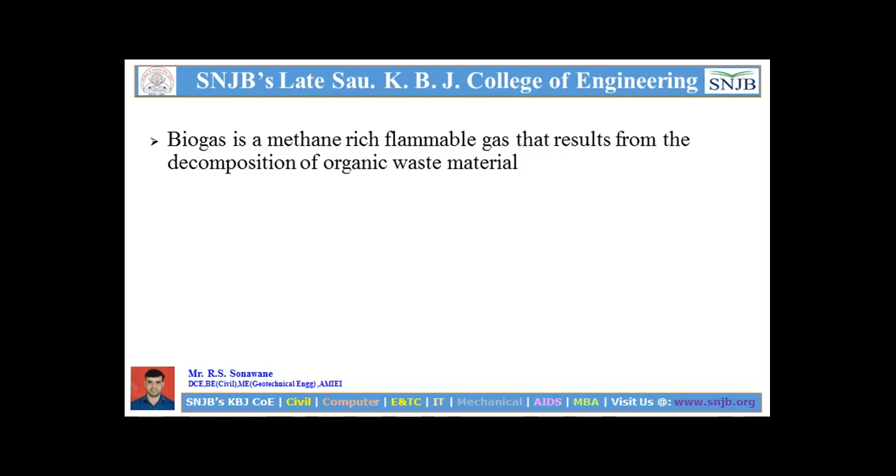Is that clear? This is the first thing. Then, biogas is produced by anaerobic digestion. In the previous 2 or 3 lectures, we discussed that anaerobic means absence of oxygen. And anaerobic digestion is the fermentation of biodegradable materials. It means in the absence of oxygen, organic matter can be decomposed, degraded or biodegraded, such as biomass, manure, sewage, municipal waste, green waste, plant material, or energy crops. Such gases produced by decomposition or degradation are called biogas.

And generally biogas is produced by anaerobic digestion or fermentation. Biogas is also called marsh gas. This is a very important term: biogas is also called marsh gas. Biogas is a type of biofuel. A biofuel is nothing but a gas which is flammable; it can be a fuel. In Marathi you can say it's a what?

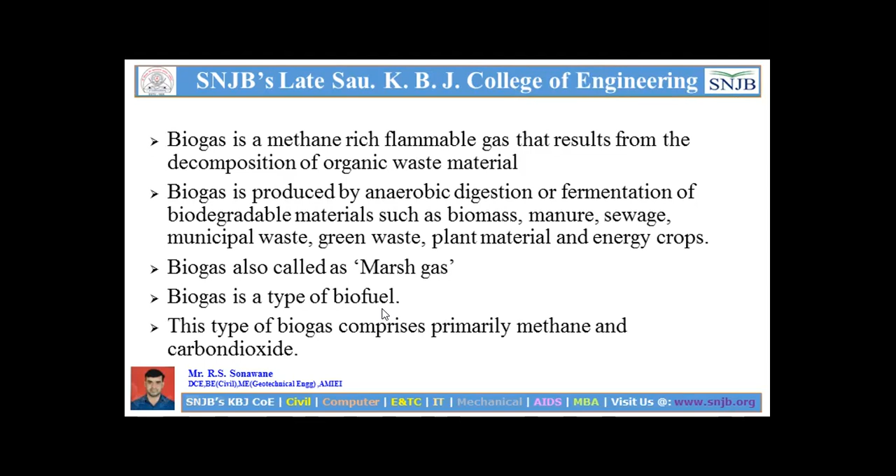This type of biogas comprises primarily methane and carbon dioxide. In yesterday's lecture, I told you how to create biogas. It's comprised primarily of methane and carbon dioxide. There can also be nitrogen, hydrogen and other elements, but mostly biogas is comprised of methane and carbon dioxide, and this is what biogas is.

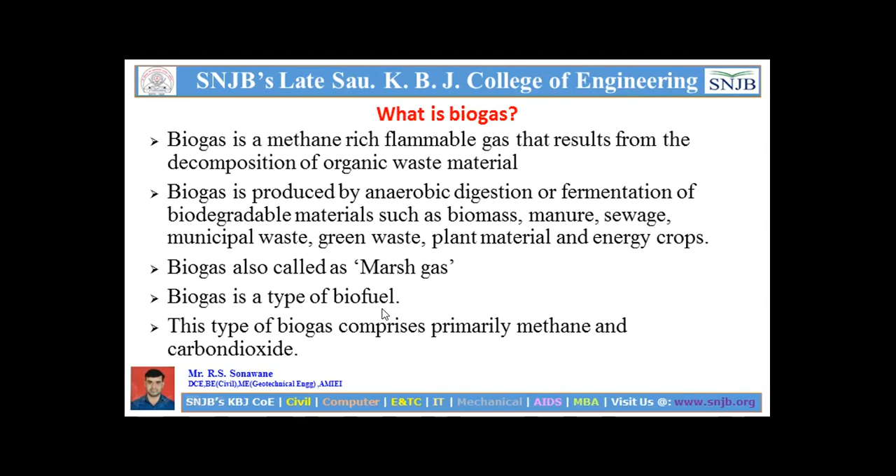If you raise the question, what is biogas? The answer is here. In short, biogas is a methane-rich flammable gas which comes from the decomposition of organic matter. Biogas is also called marsh gas, and biogas is also a biofuel. So this is about biogas.

Then we will see what the composition of biogas is. That is very important. Biogas is generated by the activity of anaerobic bacteria. Its composition depends on the composition of the raw material, the organic loading to the digester, and the time and temperature of anaerobic digestion.

Raw material, organic loading to digester, time and the temperature of anaerobic digestion. For the composition purpose, these things are very important. In the composition section, we can see here what are the substances, what are the symbols, and what are the percentages when biogas is created.

So in the substances, we can see here methane, which is symbolically identified as CH4, and its percentage in biogas is 50 to 70%. Then, in the composition of the biogas, the second substance that we can see here is carbon dioxide, symbolically identified by CO2, and its percentage in the biogas is 30 to 40%.

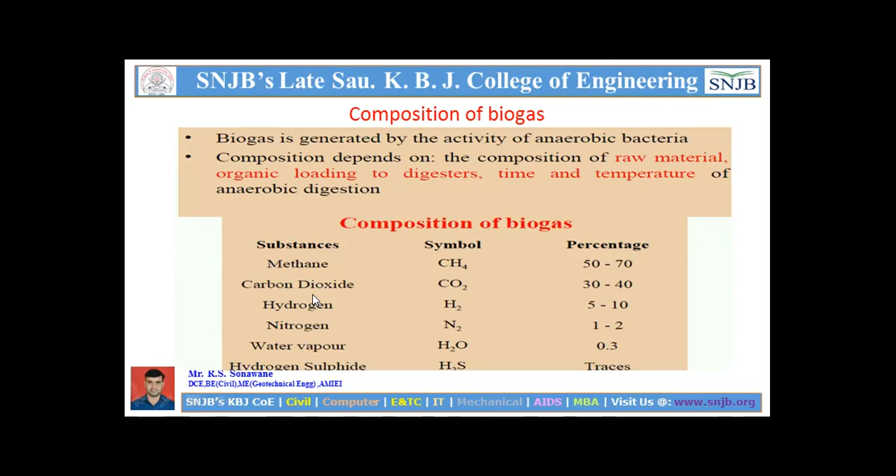So now we will see factors affecting yield and the production of biogas. What are the factors affecting yield and how to produce the biogas? Many factors affect the fermentation process of organic substances under anaerobic conditions. Out of that, we can see here the quantity and the nature of organic matter, which is very important when we are producing biogas. The quantity and nature of organic matter should be known.

The temperature is very important. Such factors we've seen in a previous lecture, the governing factors for anaerobic digestion or the digester: pH, temperature, quantity of organic matter. But once again I'm telling here, the first condition we should know is the quantity and nature of organic matter when producing biogas. Then temperature is a very important factor, and yesterday's lecture told you what temperature we maintain in the production of the biogas.

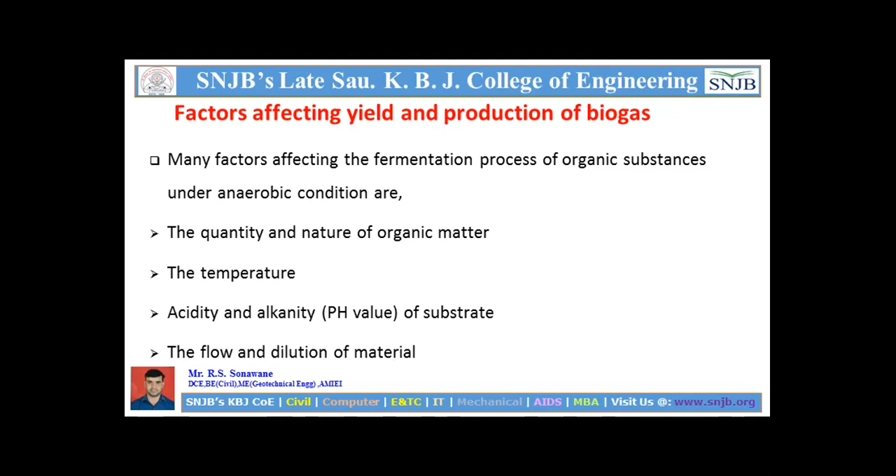Then the flow and the dilution of the material, which are related to the mixing of the organic matter, are very important when we produce the biogas. These are the very important factors for the fermentation process in the organic substances.

So now we will see here what are the reactions exactly which happen in biogas production. So you can see this organic matter, which can be separated here respectively: CH4, carbon dioxide, hydrogen, then hydrogen sulfide, and ammonia. This is a separate reaction which we use in the biochemical reaction which is happening in the

biogas production process. Okay, organic matter is broken down into a number of cells, number of subcells, and at that time it is used in that particular digestion, anaerobic digestion, and it will separate methane gas, carbon dioxide, hydrogen gas, ammonia, and sulfur gas. Okay, which uses this reaction through this organic matter in anaerobic conditions of the digester.

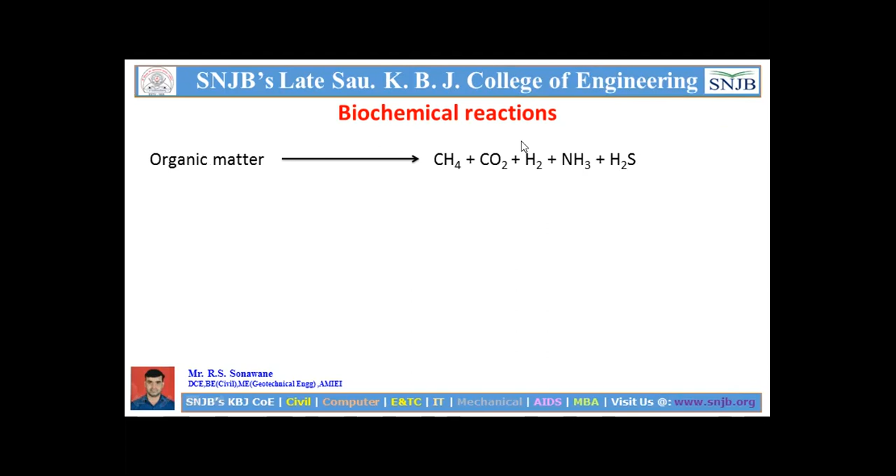The stage now, you know what conditions should be there, pH, temperature, and the other things, and what reaction will be happening in the production of the biogas. Now what are the stages of anaerobic digestion? So the stages of anaerobic digestion we already saw in yesterday's lecture, but once again I'm telling here.

The first is what? Liquefaction, and the liquefaction will be done by the hydrolytic enzymes, that is the hydrolysis stage. Already we saw our four stages. Hydrolysis stage is the first one, and in that hydrolysis stage the liquefaction is done hydrolytically by the enzyme process, that means if the temperature of that particular dilute mixture increases, at that time liquefaction may happen there, and this is a hydrolysis process.

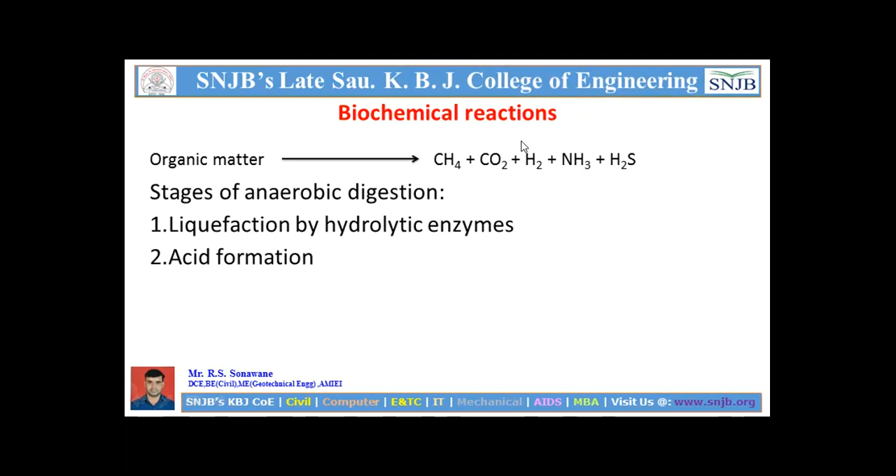Then the second stage, that is acid formation, acidogenesis, we can say stage number two, three. Then number three, that is methane formation and methanogen production. These three are very important stages in biogas production. But as per yesterday's lecture, we can see here the stages in the anaerobic process: hydrolysis stage, acidogenesis stage, then acetogenesis stage, and the methanogenesis stage. So mostly in the previous slide we took hydrolysis, acidogenesis, and methanogenesis.

So the four stages, as per yesterday's lecture: the particulate organic substrate, that is protein, carbohydrates, and fat which is present in the substances. Okay, but it is broken down in a number of different manners, so we can see protein and carbohydrates generate amino acids and sugar, and fat gives the fatty acids. This is the acidogenesis stage.

Once such compounds are produced, amino acids and sugar, the sugar can produce propionic acid and butyric acid, and the amino acid can produce acetic acid also. This is the acidic stage, and here also fatty acid can be converted into hydrogen, otherwise it can be converted into acetic acid. And then the methanogenesis stage: after getting these two compounds, acetic acid plus hydrogen are converted into methane gas, that is CH4. Okay, these are the stages involved in the production of biogas in the anaerobic digester.

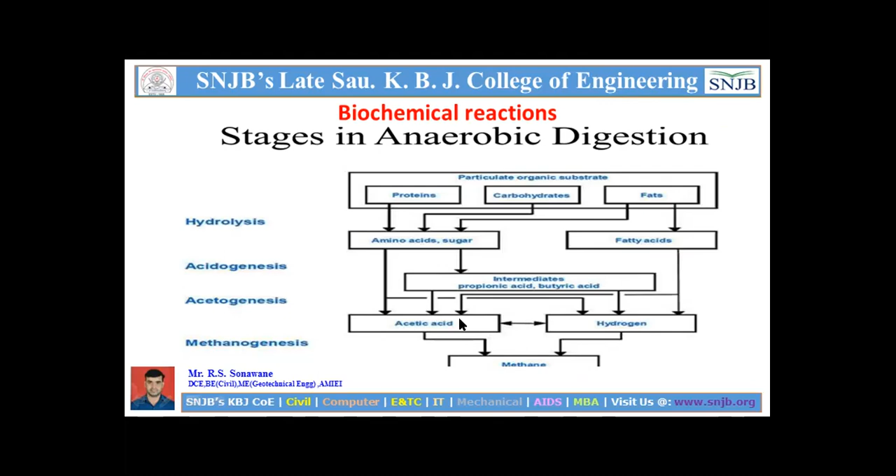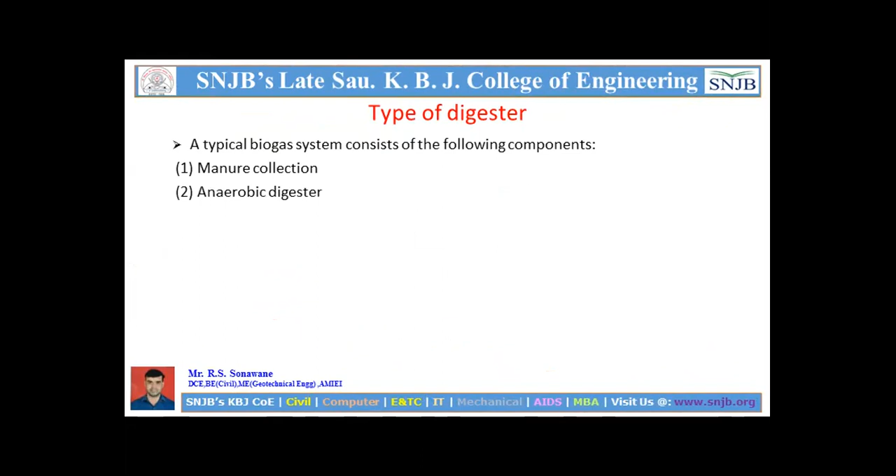So now we will see here shortly what are the types of digester. A typical biogas system consists of the following components. What are the components? The first component is the manure collection, then the anaerobic digester, third one is the effluent storage, fourth one gas handling, and gas use. So these five parts are the components of the biogas production.

Okay, manure collection, that means raw substances are required, so collection of that. Then what are the exact types of anaerobic digester with which we produce the gas, then effluent storage, then how to handle that gas. Then the fifth component, that is the use of gas. These are the main components of the digester.

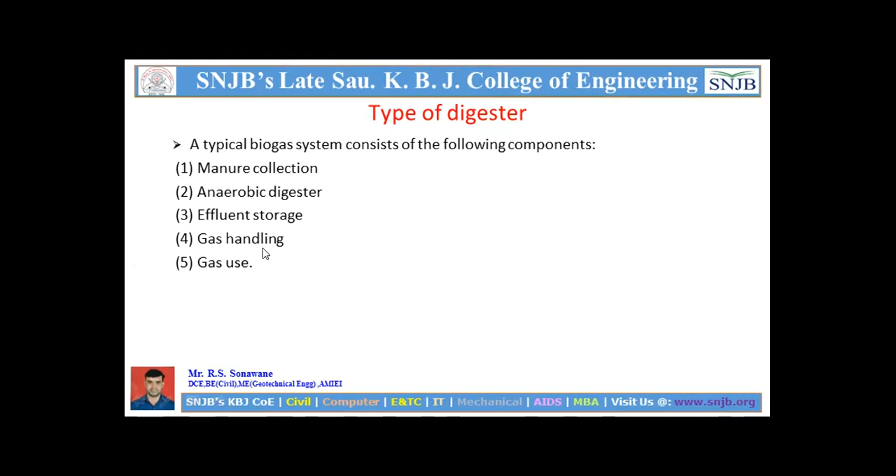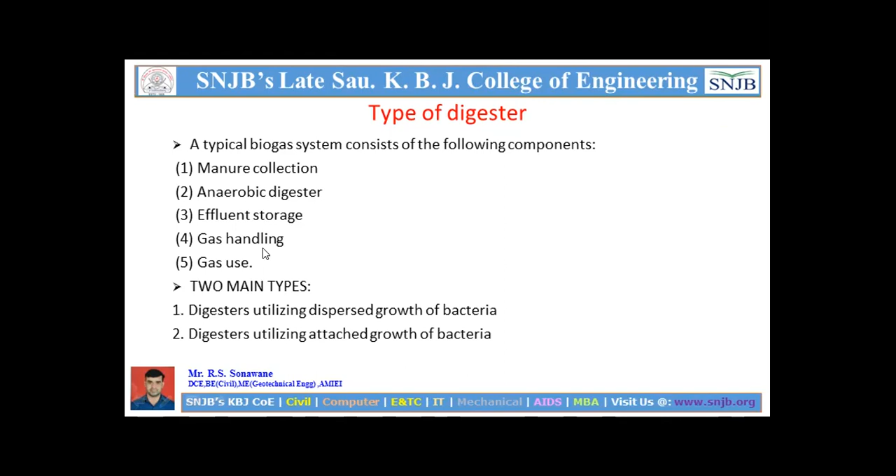Then there are two main types of digester: a digester utilizing dispersed growth of the bacteria, and second, a digester utilizing attached growth of the bacteria. Okay, these two types are very important when we produce biogas; through these two units we can produce the biogas.

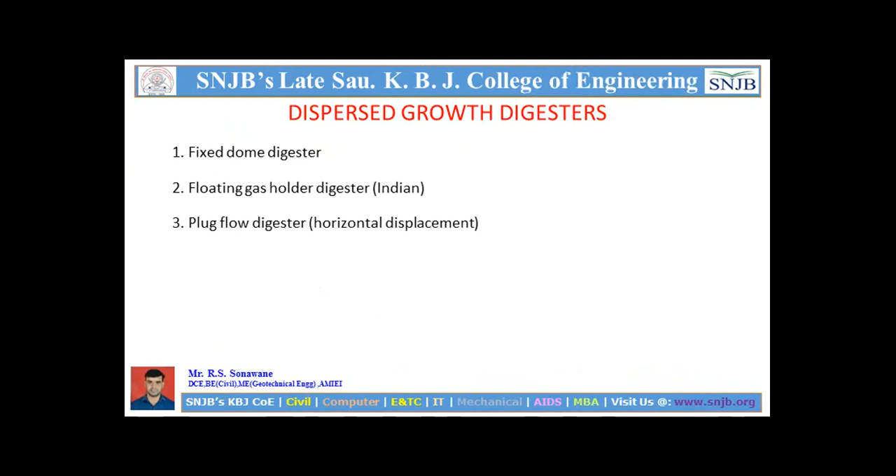So what is the dispersed growth digester? We can see here it has the fixed dome digester, then floating gas holder digester, that is the Indian type digester, then plug flow digester, which is called a horizontal displacement, and bag digester, which is used in Taiwan and Korea, and separate gas holder digester, then conventional digester.

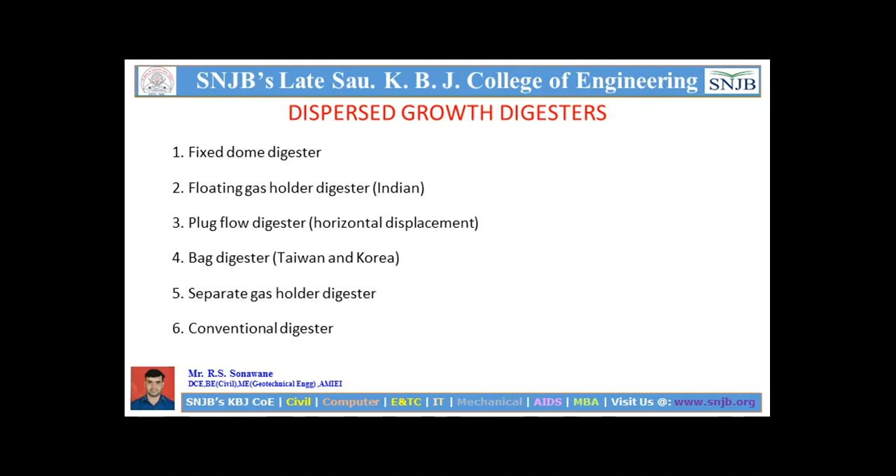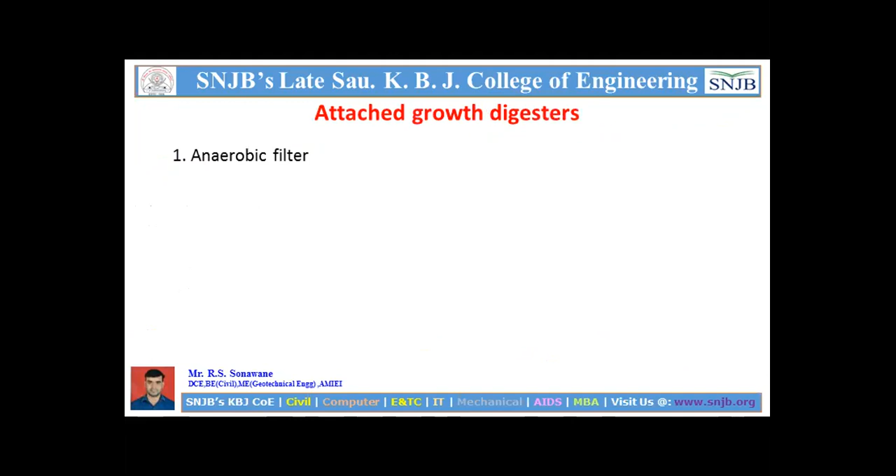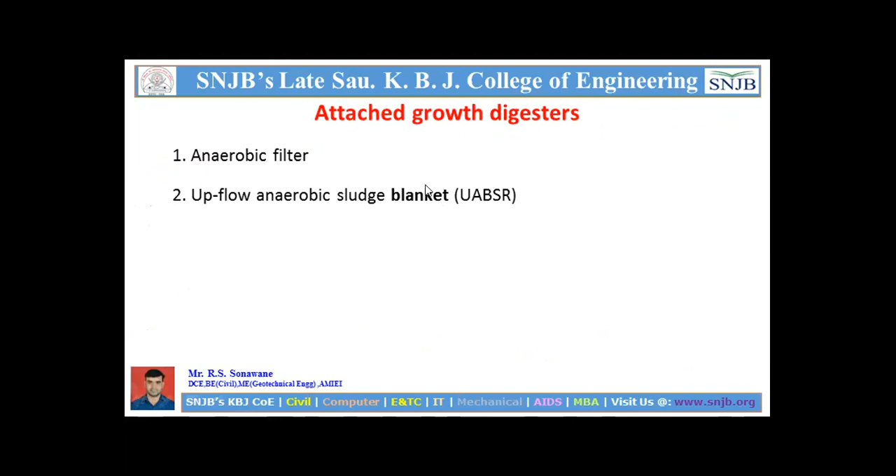This is related to the dispersed growth digester. That is the first type. Then the second type, that is attached growth digester, that will be the anaerobic filter. Then the second one, upflow anaerobic sludge blanket, that is called UASB. As per the syllabus point of view, upflow anaerobic sludge blanket is very important. We will see in the next lecture especially these two digesters, which are very important in the production of biogas.

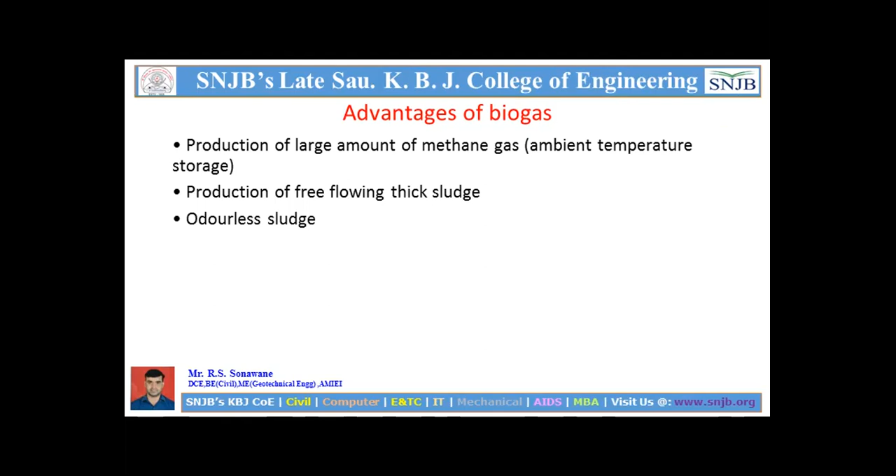So now we will see what are the advantages of biogas. Production of a large amount of methane gas, that is ambient temperature storage. So production of a large amount of methane gas is one of the advantages of biogas production. Then production of free flowing thick sludge, again one of the advantages. Then odorless sludge: when we use the sludge for production of biogas, the sludge never gives any odor. Then sludge can be used as fertilizer and soil conditioner.

So I want to give one example in Marathi here.

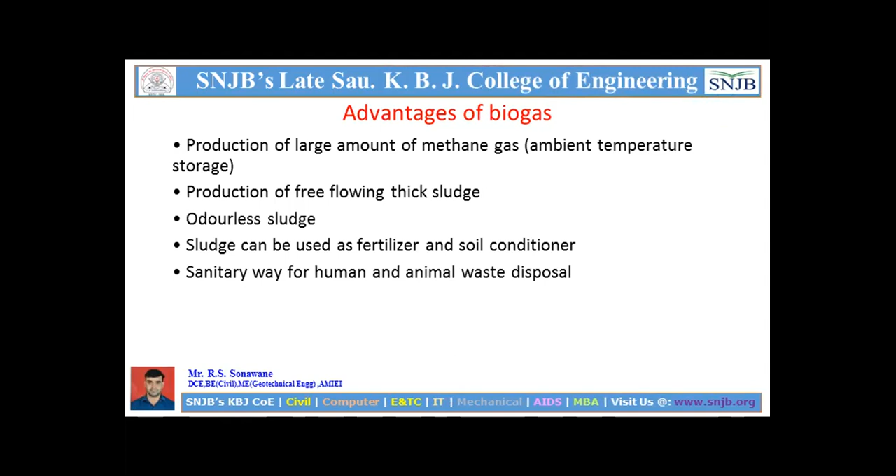Then sanitary way for human and animal waste disposal. It may be used as a sanitary way for disposal of human as well as animal waste. I just told you the example of that. Then conservation of a scarce resource like wood. So many times this biogas is used in place of scarce resources like wood.

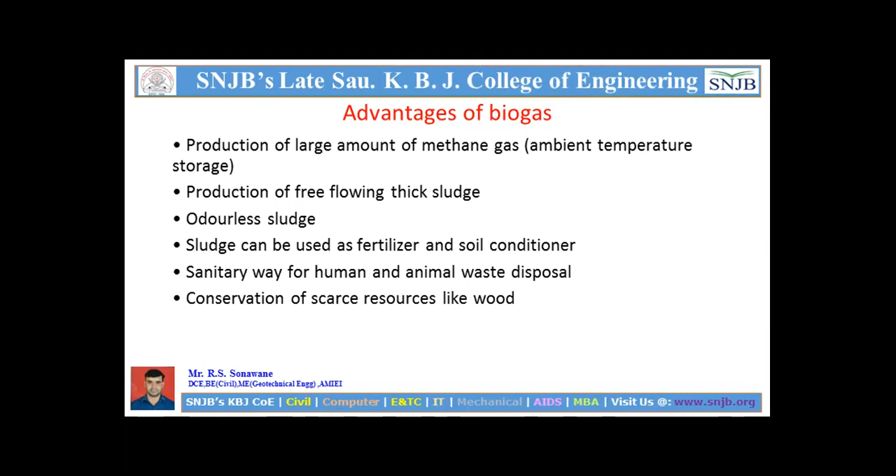Okay, these are the advantages. Now we will see some disadvantages of biogas. Explosion chances: methane gas is created and there is a chance of sudden explosion, or due to a temperature increase an explosion may happen. This is one of the disadvantages. High capital cost. The incorrect handling of liquid sludge causes pollution; it may cause odor, smell, or pollution.

Requires control and maintenance. It's very hard to control and maintain. Needs proper conditions; maintaining proper conditions is one of the disadvantages. And use as fuel requires removal of carbon dioxide and hydrogen sulfide. If you use biogas as a biofuel, at that time we have to remove carbon dioxide and hydrogen sulfide. This is one of the disadvantages we've seen here.

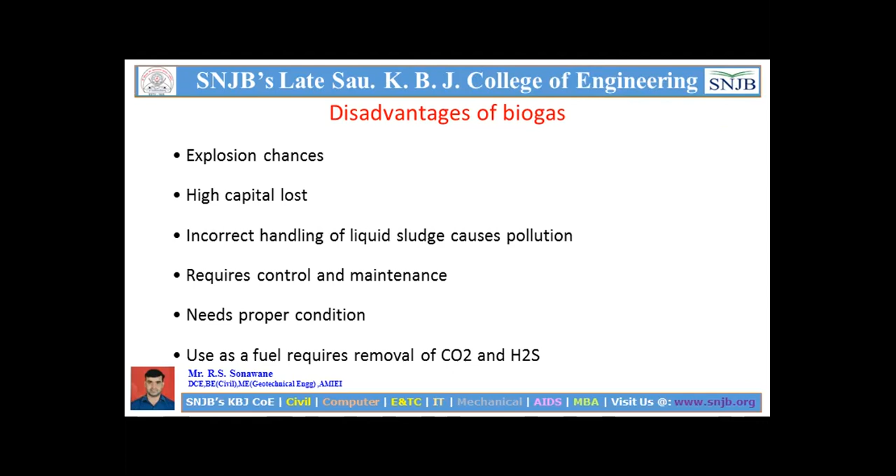So in today's lecture we've seen how to produce biogas, what stages are involved in biogas, the exact meaning of biogas, and the types of biogas. Then we've seen the advantages and disadvantages of biogas. So I conclude today's lecture here.